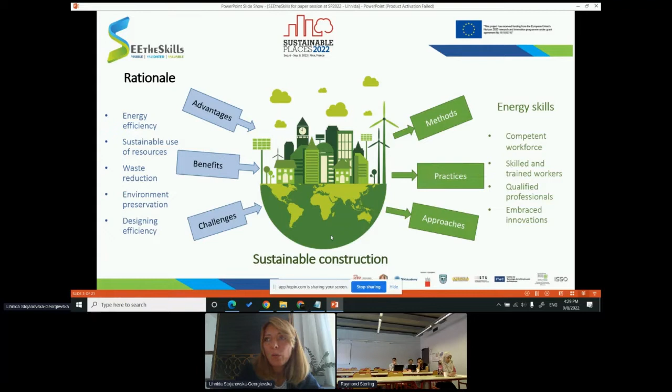And beneath all of them, as a crucial prerequisite in order to reach sustainable construction, are the energy skills. We need a competent workforce, skilled and trained workers, and qualified professionals. As stated in the title of the speech, our project is dealing with supporting the development of energy skills.

What is the project SEEtheSkills about? It is based on what we like to call a novel triple V approach, because we are dealing with the visibility of skills, then their validation, in order to bring the value of the skills to a higher level. So this triple V approach is related to visibility, validation, and value of skills. These are also the three main objectives of our project.

We plan to achieve these goals by creating an integrated database of energy skills, an area where three different databases will be interconnected and merged in order to support further matching, leveling, and mutual recognition of skills. We have a separate database of training schemes, which will list and link all available training schemes leading toward sustainable energy skills. The second database relates to skilled and certified professionals. The third database will encompass materials and construction products along with their energy efficient properties.

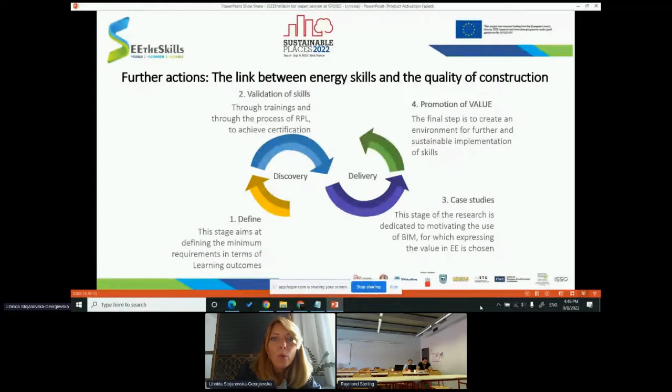The idea is to use the digital skills in the form of BIM skills to perform a number of case studies, where these case studies will show the value of employing skilled professionals in order to bridge the performance gap, the energy performance gaps in the buildings. We assume that this approach will result in showing the value of skilled professionals and their skills.

So this slide also confirms the thing that I said before. We will use energy skills in order to show their value by using BIM skills, which is also a vice versa relation, which should also result in confirming the value of digital skills like BIM skills.

Another tool that will be developed within the project in order to act toward increasing the value of energy skills is to engage homeowners to recognize the value of energy skills through self-evaluation of their apartments. The post-occupancy evaluation tool is already implemented in one of our previous projects, but now the aim is to spread it and also to modify it to be more user-friendly for the homeowners and the occupants.

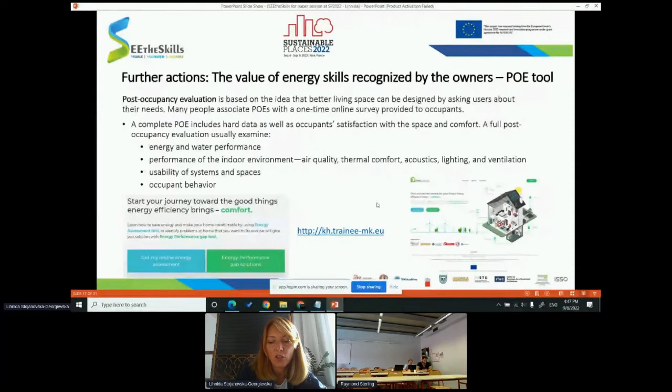This is in order to make self-evaluation of their apartments in terms of energy efficiency, and they will get some kind of results like this regarding the quality of construction, the quality of appliances and energy efficiency measures that are implemented, and also, most important, some recommendations will result with links to the database of available skilled professionals that could implement those measures in order to increase the energy efficiency of the apartments of the owners.

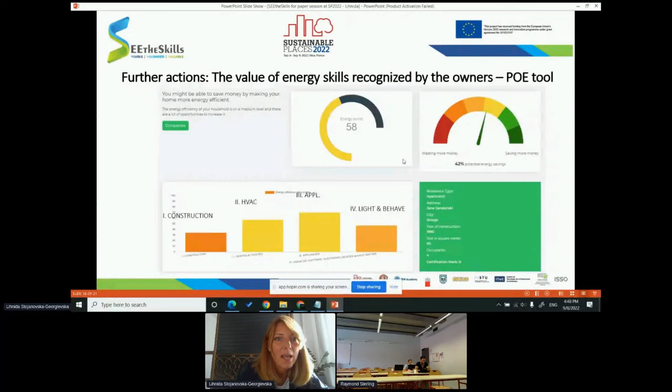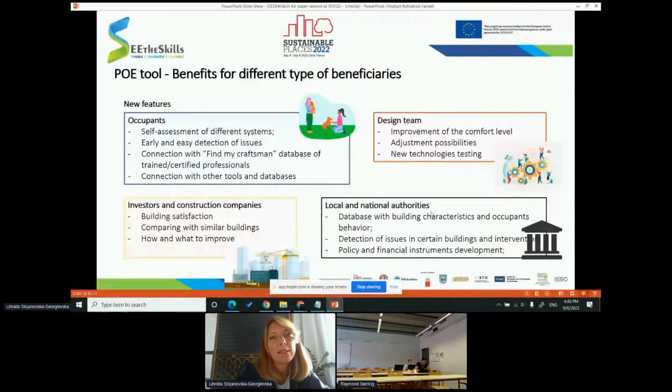So the benefits will be multiple for a number of different groups, like the occupants, as I mentioned before, but also design teams, investors and construction companies, and local and national authorities. This is something that should follow in the next period of our project. In order to reach sustainable construction, sustainable offer of energy skills is more than important, and it is a prerequisite for reaching our sustainable future.

One of our partners in the project likes to use this quote, and that's why I put it on the last slide: let's change the building workforce in order to change the sector. Thank you for your attention.

I hope I stopped sharing my slide. Thank you, Lihnida, and we really appreciate it. And now we are going to present another paper from University of Bradford. Gurkan Yildirim is going to present. No, he's not there. Oh, no, Gurkan is here. Yes, Gurkan. Okay, you came. Great. Okay. Hi, can you hear me?

You're going to present upcycling waste originated from construction and demolition practices to manufacture geopolymeric construction materials. Hi, so can you hear me now? Yes, perfectly. Okay, and you can see the screen, yeah? Yes. Thank you. Fine, go. So I will just start because I can't see you. I think this is how it should be.

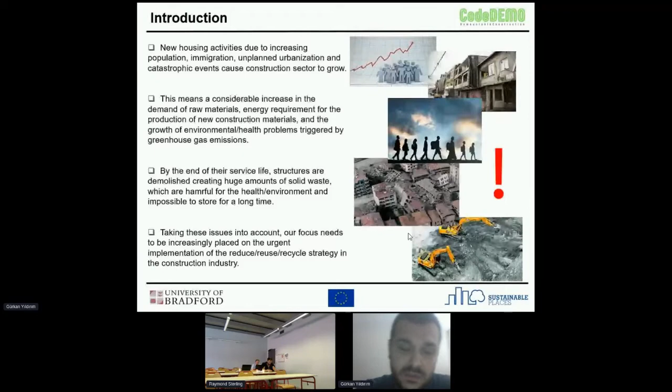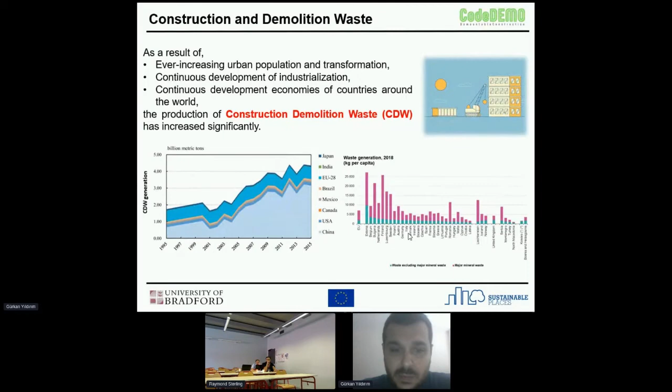When you take a look at more advanced countries, Belgium in this regard is really good. They can transform construction and demolition waste up to 80%, 85% in that range. But what they do is quite straightforward: they just crush these materials and use them as road base or sub-base materials, which is downcycling. So what we are proposing is to use these materials in an upcycling way and make the most out of them. Because when we stop building roads, what are we going to do with this construction and demolition waste? So we need more innovative and up-to-date solutions.

There are, of course, multiple adverse effects of construction and demolition waste. One is that you need to stock these materials in open areas, which leaves you with the need for large, clean landfills. This will lead to hazardous pollution, and of course, you're going to waste your natural resources. To build a new structure, you will need clean raw construction materials—cement, aggregates, or concrete—which will also increase the global warming rate.

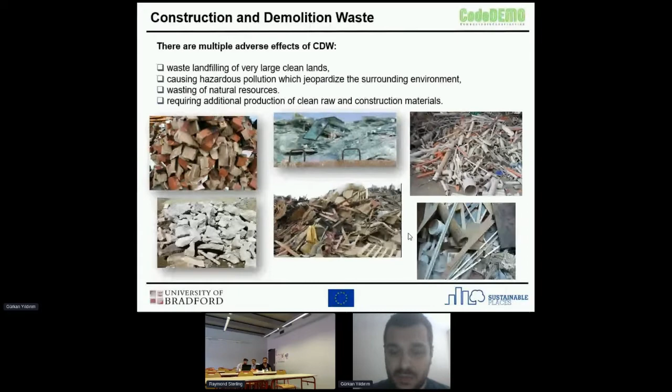Our aim in the CodeDEMO project is to produce and develop completely green concretes out of construction and demolition waste. We get rid of Portland cement, the main binder in traditional concrete, entirely by using alkali activated materials made out of CDW materials such as tiles, bricks, and waste concrete and waste glass powders, in mixed and single forms. Then we incorporate waste concrete aggregates into the designs of these geopolymeric binders, and in the end we obtain a green concrete material.

This is what we aim currently, because we couldn't get to the stage where we get the concrete mixtures, but we are currently developing it. We look at different parameters, such as what happens when we use CDW waste-based materials individually versus in combination, since construction and demolition waste includes a wide variety of materials such as tiles, bricks, waste concrete, and waste glass. So how about if we use them in combination, or individually—which one would be better? This is one of the questions.

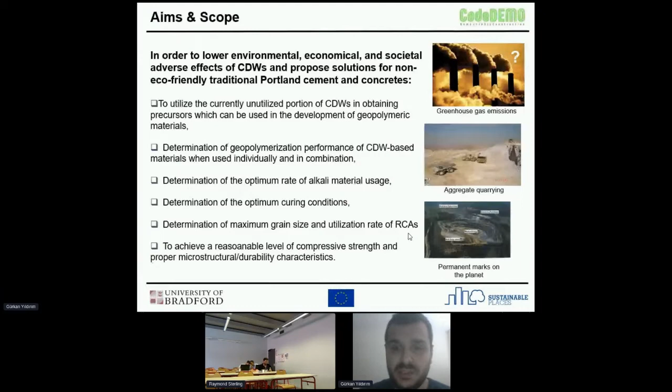Another issue is we need to use aggregates inside a certain binder to obtain mortar or concrete. What will be the maximum aggregate size and the volume or utilization rate of recycled concrete aggregates? In the end, what we need is to achieve reasonable compressive strength and a material with microstructural and durability characteristics similar to or better than traditional concrete. By doing this, we get rid of aggregate quarrying, we get rid of the permanent marks on the planet caused by the production of Portland cement, and we also reduce greenhouse gas emissions significantly.

So what we proposed here is explained in the experimental program slide. You will see that in a normal conventional structure, you would have glass, roof tiles, hollow bricks, different types of red clay bricks, and concrete. When you demolish this structure, you obtain these materials all together.

But the new approach to demolition of structures is more centered on selective demolition, where you obtain these materials separately, so that you can choose different proportions of these materials depending on your need.

As a result of this selective demolition procedure, we collected hollow brick, red clay brick, roof tile, glass, and concrete wastes. We crushed and grinded them in laboratory conditions. Of course, you need a certain fineness to make these materials reactable with the alkaline activators you see on the right side, such as sodium hydroxide, sodium silicate, and calcium hydroxide. Then we add recycled concrete aggregates, after crushing and sieving, into these geopolymer binders to obtain the mortars and concretes in the final stage.

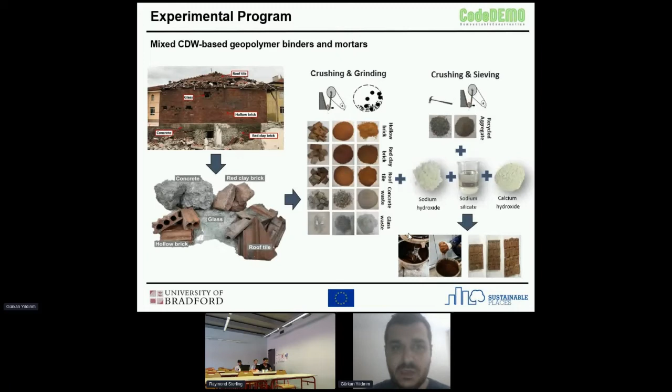This is the midterm results—the compressive strength results of geopolymers based on construction and demolition wastes. But this is our first step. We focused on single utilization of these source materials: roof tile, red clay brick, hollow brick, glass, and concrete. And we only used sodium hydroxide as the alkaline activator.

In order to get a reasonable compressive strength level, we needed to cure these materials in an oven at 105, 115, and 125 degrees, because lower temperatures didn't give us good results in terms of compressive strength, so we increased the level of heating. But keep in mind this is only with sodium hydroxide and only with single materials.

The same situation was valid for concrete as well, because concrete waste has some unhydrated and hydrated cement and concrete particles in it. The strength results when we singly activated concrete waste were a bit low. So we came up with the idea of mixing these materials in order to get better strength results, and in order to diversify what we're using as source materials.

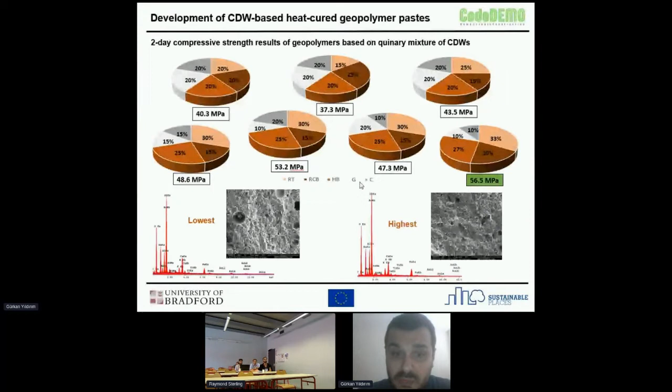Heat curing is energy intensive, as you might imagine. So what we wanted in the following step was to get rid of heat curing, and we tried different alkaline activators to do that. We were using sodium hydroxide at the beginning, then we combined it with different alkaline activators such as sodium silicate and calcium hydroxide in different proportions, and then we incorporated the CDW-based precursors or source materials and geopolymers with fine and coarse recycled aggregates coming from waste concrete.

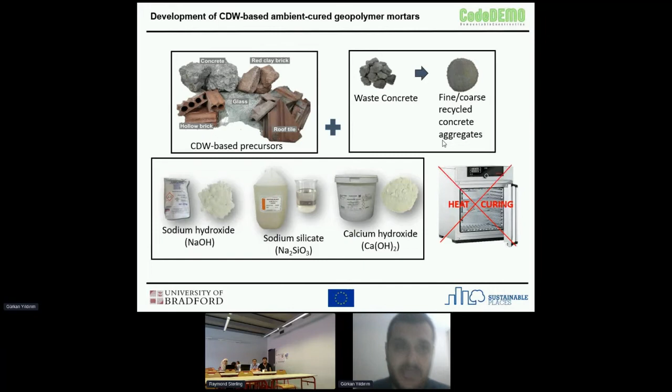So in the end, what we are left with is a concrete material made out of completely construction and demolition waste. This is the following step. This is where we are at the moment, and we are currently working on developing concrete mixtures with coarser aggregates.

You can see when we combine sodium hydroxide with some amount of sodium silicate, SS meaning sodium silicate, we were able to get almost 25 megapascal of compressive strength under ambient curing. So we got rid of the heat curing, which was very energy intensive. And when we incorporated these proportions with only 20% of GGBS slag, ground granulated blast furnace slag, the strength levels increased even higher, reaching almost up to 35 MPa compressive strength.

But the CodeDEMO project proposed completely CDW based concrete. So although this strength level is higher in the case of slag usage, we are still trying to develop this 25 MPa strength level, which is fine, but we are still trying to increase the compressive strength by changing the mixture proportions and working on different proportions of alkaline activators.

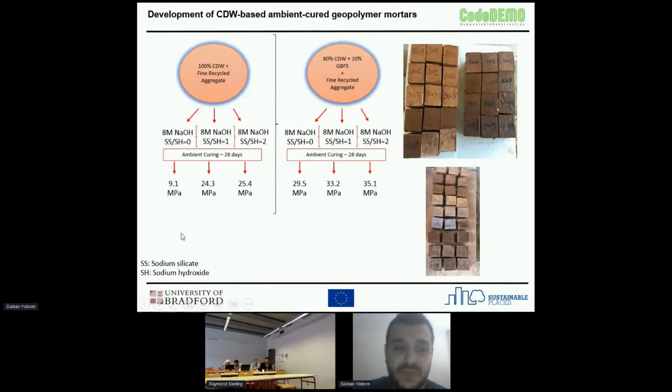So we did some further tests. Another issue in the case of geopolymers or alkali activated materials is the drying shrinkage. This is also an issue in traditional concrete mixtures, but it becomes more pronounced in the case of geopolymers. Depending on the use of different types of alkaline activators, we were able to limit the drying shrinkage strains significantly.

Depending on the type and utilization rate of your alkaline activator, you could see that the microstrains forming as a result of drying are significantly different. So when we use sodium hydroxide with calcium hydroxide, there were no cracks in our drying shrinkage specimens. But when we used sodium hydroxide, sodium silicate, and calcium hydroxide combined, we saw some surface microcracks, which is not desirable in terms of durability.

But when we combine 100% CDW based mixtures with 20% of slag, we were able to reduce the level of microstrains as a result of drying by up to 20 to 30%. So this is also comparable to traditional cement mortars.

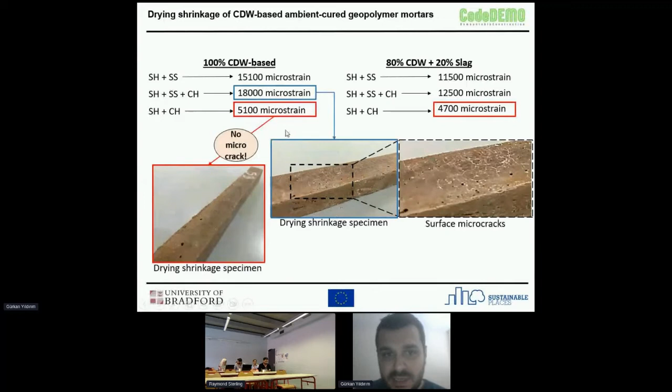But we were also able to limit the efflorescence formation significantly by changing the type of alkaline activators we used. Depending on what we used, we were able to eliminate efflorescence formation significantly. And although there was some efflorescence formation, this didn't cause any problems in the mechanical property results and the strength level of the developed mortars.

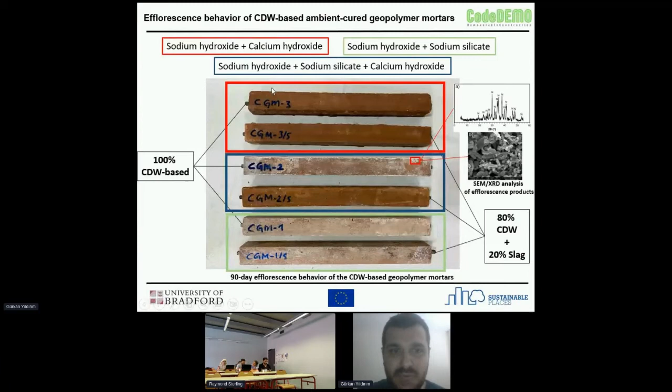Even when we use 100% CDW, we're still okay. These are the SEM pictures with some EDX analysis on the right side.

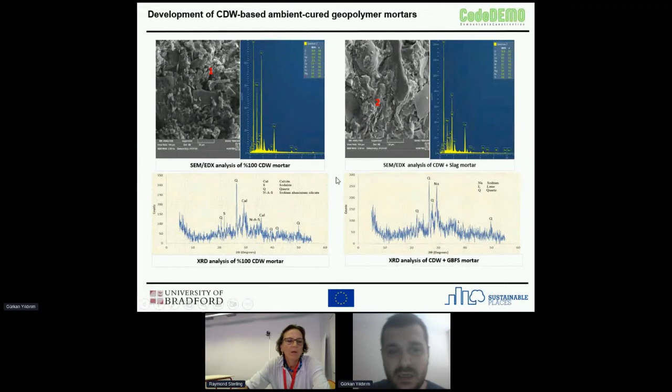Gurkan, I just ask you to wrap up because we are running late. I just give you, okay. I will just skip this, this is my last slide before last slide, so I'm gonna wrap it up.

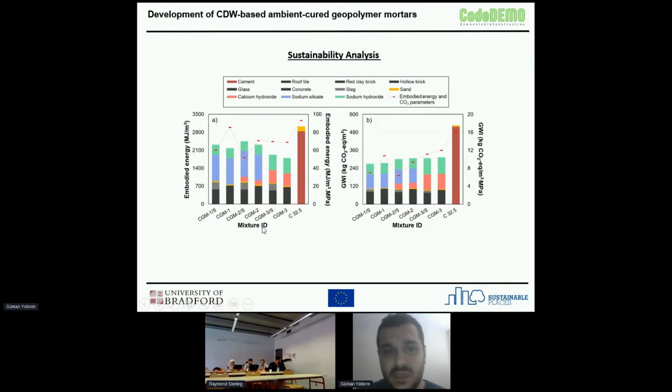Sorry, so this is the sustainability analysis we did. We took a look at embodied energy and CO2 emission analysis. What we saw in the end was that we were able to reduce the embodied energy, and the amount of carbon dioxide that would otherwise be released to the atmosphere would be significantly reduced.

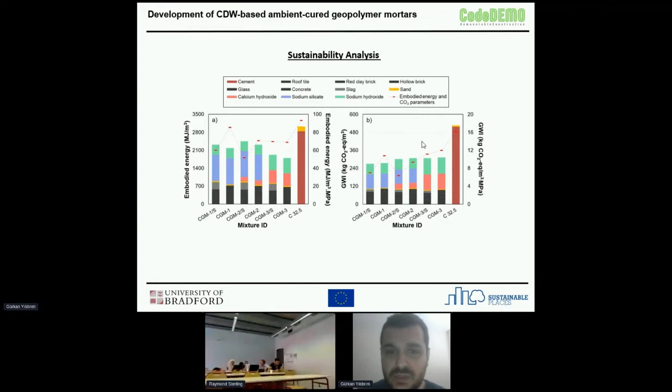This was mostly related to the utilization of sodium silicate, and now we are also working on developing sodium silicate out of waste glass, which would reduce the level of CO2 emissions significantly.

So as a conclusion, we managed to show that it is possible to develop concrete mixtures, mortar mixtures with significantly lower CO2 emissions and energy requirement with complete construction and demolition waste. And we were able to reach compressive strength levels with suitable durability properties comparable to traditional Portland cement-based systems.

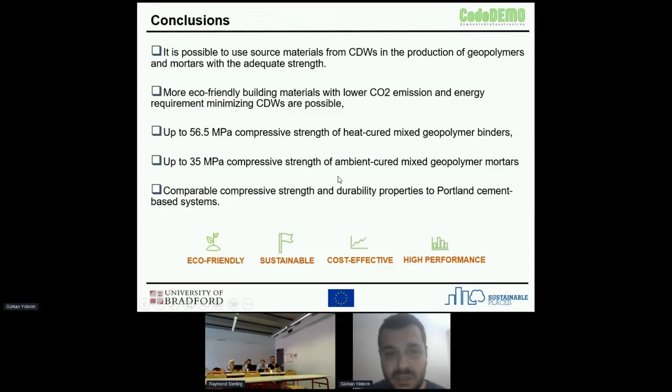So thank you very much for your attention. If you have any questions, I will be more than happy to answer.

Thank you very much, Gurkan. Thanks a lot, because I just pressed you to finish, but we are running late, and I'm sorry. I would like to apologize if I took too long. Don't worry, you were very clear. So thank you, I want to introduce now from ITEC Licinio Alfaro, and he's going to present

TCQIGMA environmental software, quite curious about this paper and this acronym. Thanks, go. I think it's Miltiadis, no? Yeah, Licinio Alfaro is not here, so it's Miltiadis. Okay, so it's not present. I thought it was one of the presenters here. Okay, sorry, it's not present. So we go to... it's frozen. It's completely frozen. Miltiadis is present, but I thought it's... No, yeah, Miltiadis is present. Hi, sorry, okay, you were frozen. Sorry, I thought it was frozen. Okay.

Okay, so Miltiadis, we go with you. Miltiadis from RINA Consulting, and you're going to present Metamaterials and the built environment, a review into their perspective for the enhancement of resiliency. So exactly. And we also hear you very well. Thank you, go. Okay, so hello to everyone.

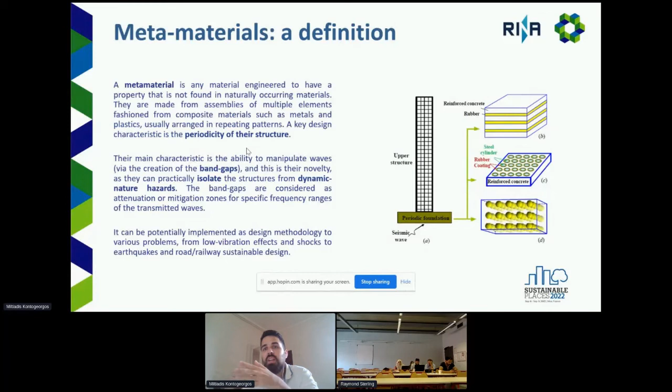Literally, the band gaps are mitigation zones that refer to specific frequency domains, meaning that for specific frequencies of wavelengths, there is observed mitigation or even denial of waves transmitting through our medium. This means we can protect our structures because we are not letting the waves transmit through our medium, so the energy they carry does not finally affect our structure.

Our goal is finally to calculate these band gaps in order to know, according to the hazard we are dealing with, what are the desirable frequencies that we want to stop, and so protect our structures.

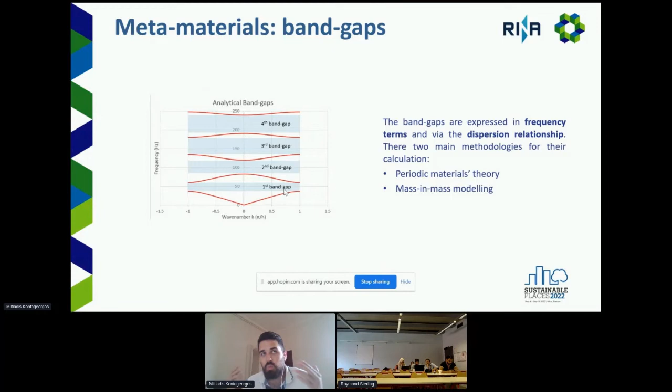I will briefly present, just to take a taste, the two dominant theories for calculating these band gaps, in order to have an idea how we can design a metamaterial.

The first theory is the periodic materials theory, based on the resolution of the equation of motion for its layers. That means we are examining wave transmission through periodic layered material, using the four boundary conditions, including the Bloch-Floquet theorem, in order to produce these dispersion relationships.

Here, K is the wave number, H is the thickness of the unit cell layers, and R, C, and T are some parameters of our materials.

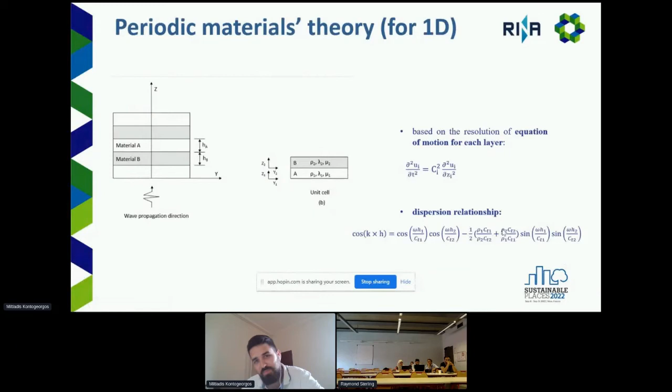The next theory is the mass-in-mass modeling, which may be more familiar to a broader audience of engineers. It is based on the resolution of motion for the infinite lattice, because we assume an infinite lattice in the beginning, and then reduce our calculations to the finite lattice, since in the end we have a finite lattice.

An infinite lattice is not achievable, so here the equations for calculating the band gap are far easier, but they also have some restrictions when we try this methodology for 2 dimensions and 3 dimensions.

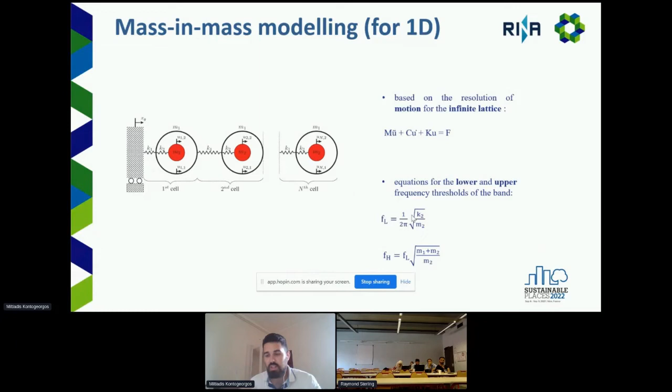These were some brief introductions just to give a taste of how we design metamaterials. Now I am entering into the basic aim of this presentation: metamaterials and the built environment.

Almost for every dynamic nature hazard, we can develop a metamaterial concept. This way we can block the consequences of various phenomena, from seismic hazard, noise pollution, blast hazards, and enhance the resiliency of systems, buildings, our structures, and finally the resilience of our community.

In this schematic, you can see plenty of meta concepts that I have categorized in the right column according to the hazard we are dealing with in each case. So for seismic hazards, we can have the meta plants.

Some projects have dealt with calculating the mitigation effect towards seismic energy of forests, for example. We have the seismic cloaks, which are only for surface waves. We also have the meta foundation, which you can see here, and the meta gravel, for the protection of underground gas transmission pipelines.

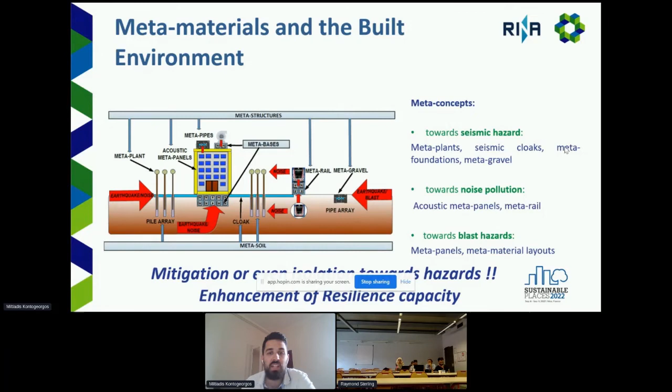To be more specific, I have included in my presentation some real cases connected to energy infrastructure.

This is the problem so far with the metamaterials because we are designing now, we need big dimensions for our metamaterials. It is not so easy at this stage of research to use metamaterial concepts for common buildings and structures. And for this reason, we have started from critical infrastructure and structures that demand bigger dimensions in the foundations.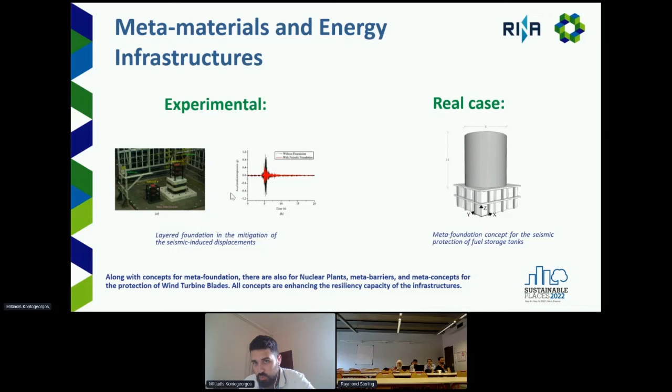We have named specifically some potential metamaterial concepts. For example, we can use the meta foundation concept, which has been implemented for fuel storage tanks in electricity plants, and this way increase the resilience capacity of electricity plants.

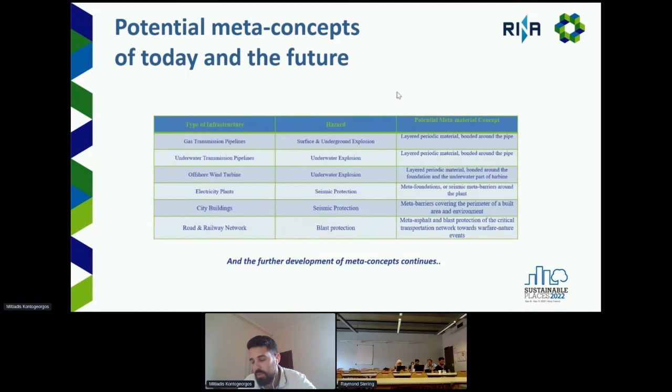And of course, the further development of meta concepts is continuing until today. Thank you very much for your attention, and I am open to answer any of your questions.